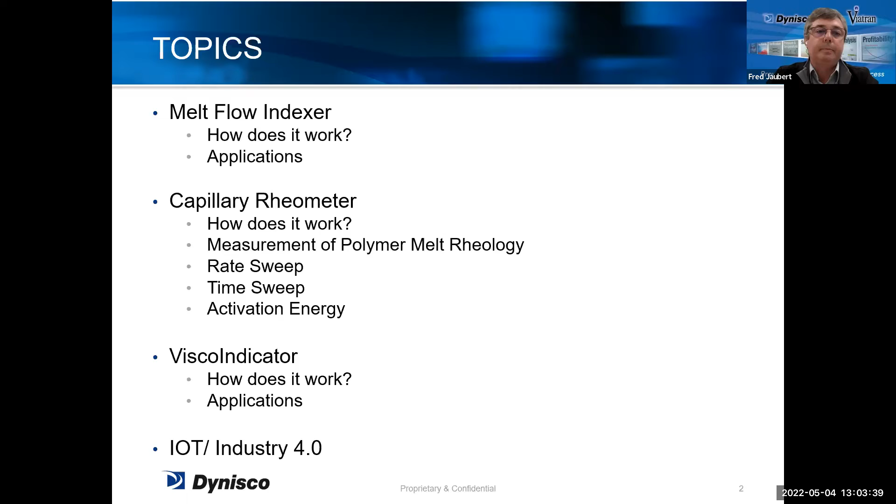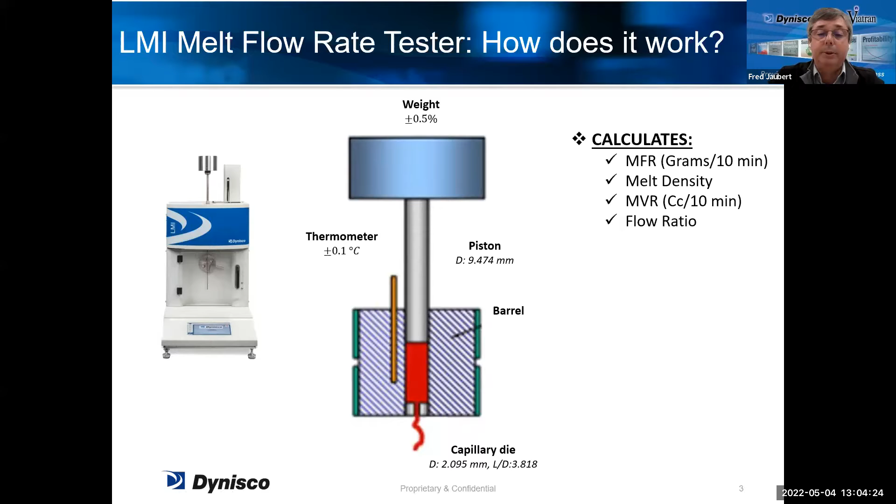So first of all, the melt flow indexer, also called the melt flow rate tester, gives a result called the MFR, or melt flow index, MFI. The principle of the instrument is pretty simple: you have a barrel which is heated at a standard temperature given by the standards, and you have a capillary die at the bottom. You put the sample of material in, heat it up, and you have a piston and a weight. You push the material through the capillary die and measure the throughput in grams per 10 minutes. That's a very basic and raw measurement, made by a lot of plastic manufacturers to check their incoming material or when they are doing recycling.

So as I said, the applications of the melt flow indexer, which we call LMI in Dynisco, is to check incoming material before processing it. This applies to all types of industries—could be extrusion, injection molding is also quite a big portion of users of melt flow indexers, because we get material in silos and you need to check the material before you put it in the silo. It's also used by recycling companies, compounders, or resin manufacturers to be able to provide the specification of the product they are going to sell to end users. Finally, it's the first instrument used in research and development for quick testing of the behavior of a plastic and the flow of a polymer.

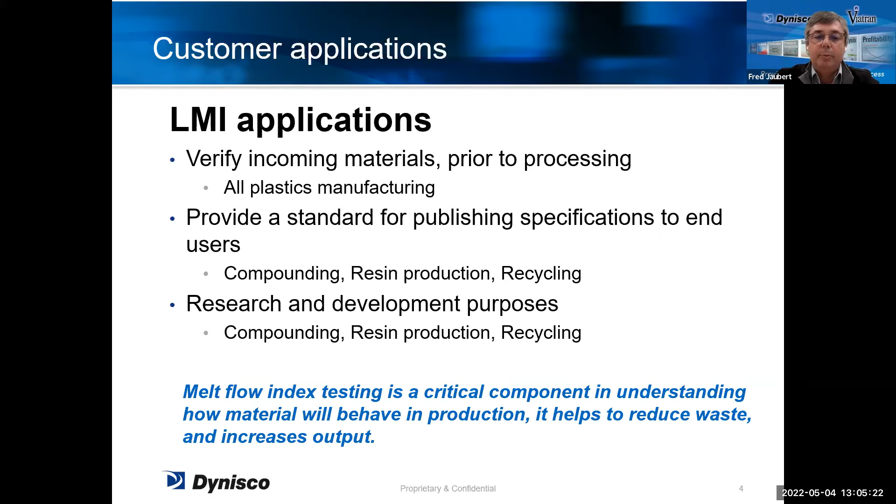So the second instrument I'm going to emphasize in my talk is what is called the capillary rheometer. The capillary rheometer is, I would say, the big brother of a melt indexer. It's a similar process: you still have a barrel which is heated at a certain temperature, but it's much more flexible. The standard used for the capillary rheometer doesn't really impose a specific temperature, load, and so on—you can really do whatever you want with it, and we will see later the results we can obtain. So basically you also have a capillary, but the capillary is also flexible.

And instead of putting a load on the top of a piston to push the material through the capillary, we have a motor, and we are applying a force, or what is called a shear rate, which is much stronger than what you can get with a melt flow indexer. In this case, we are not measuring flow by the throughput of material and weighing a sample. We are using a load cell or a pressure sensor to measure the force applied to the polymer through the capillary.

And of course, we usually have a computer system attached with software which helps make the analysis of the polymer at the end.

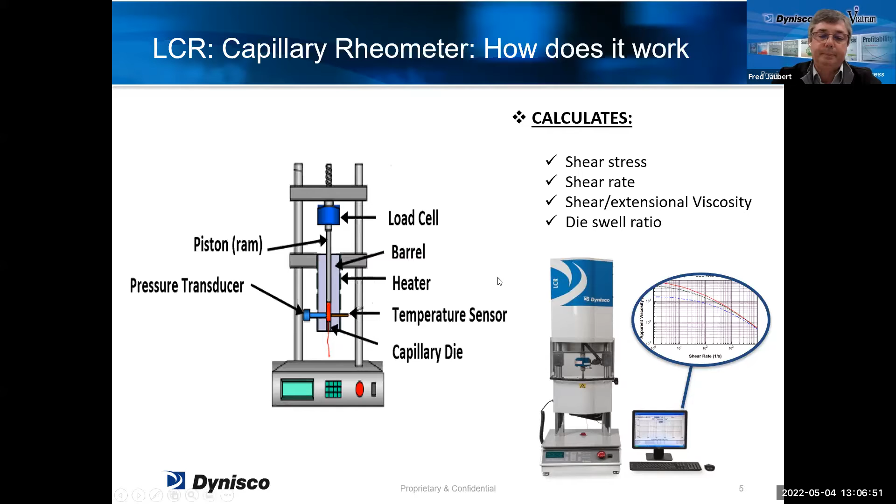So what is the advantage of using different types of instruments based on your conversion process? If you are doing compression molding, for example, which is a simple process in terms of polymer viscosity, you can use a melt flow indexer. It's well used for this type of process.

If you are doing extrusion, the melt flow index is still a valid measurement, but you are really at the border of what it can measure. And if you are doing injection molding, you have forces, so shear rates, which are much, much higher than in extrusion. In this case, the melt flow indexer is absolutely not adapted, and this is where the capillary rheometer comes into play.

You also have the dynamic rheometer. Dynisco has a sister company called Alpha Technologies who makes dynamic rheometers, where you can also make viscosity measurements, slightly different from the capillary rheometer, but with some limitations in terms of temperature and shear rate that you can apply. So basically, you have to play a little more with testing conditions.

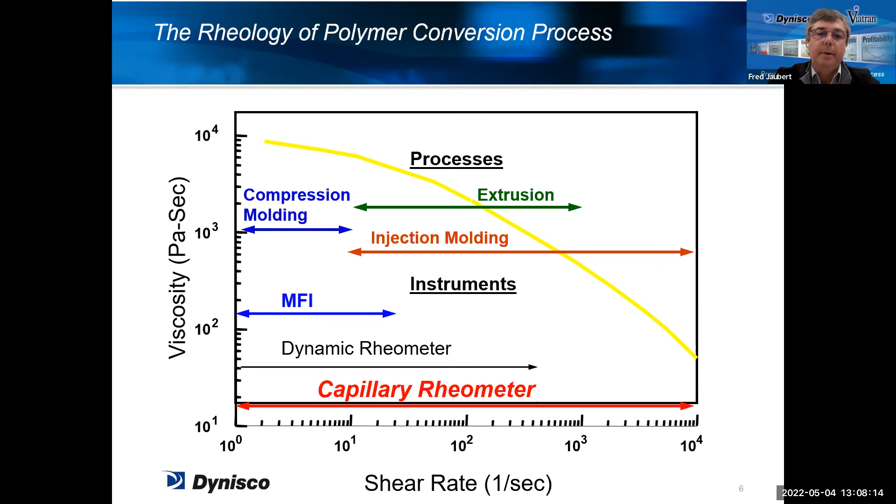So again, what are we doing with a capillary rheometer? We are measuring the melt viscosity of a polymer. Basically, as I was showing earlier, we are simulating exactly the same conversion process, especially injection molding. In injection molding, first you have a screw which mixes the polymer, but then the second step is to push the polymer through a nozzle and through channels into the mold, which is pretty similar to pushing material through the capillary die of a capillary rheometer.

So the principle of the measurement is based on the rate of flow versus the force. The rate of flow is the shear rate, and the force will be converted to the viscosity of the product.

You have two modes of operation to run the capillary rheometer. One is called the rate sweep. Basically, you are going to vary the speed of the motor, so you vary the shear rate, and then measure the range of shear stress and viscosity over that range of shear rates.

The second possibility with this instrument is, instead of running various shear rates, you can run the same shear rate over a period of time, with pauses in between, and then you will be able to measure what is called the thermal stability of a polymer.

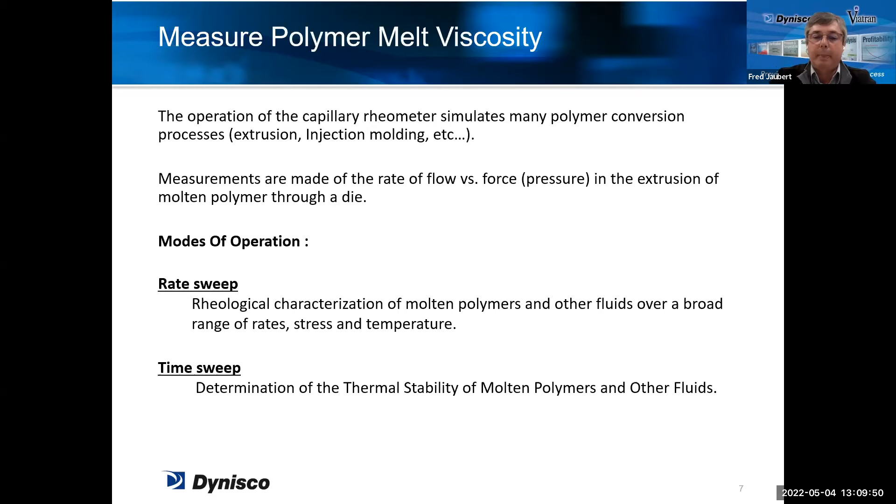First of all, what we call the rate sweep or shear sweep test is where we vary the shear rate. The polymer is melted into the rheometer, and this is done at constant temperature. In a capillary rheometer, you cannot really change the temperature during a test. You can make tests at different temperatures, but for one test, you can only run at one temperature.

What we are going to do is give a constant speed to the piston, and this will generate a constant flow through the capillary. We measure the force or pressure needed to maintain that constant flow. Once we have a stable measurement, we stop and move to the next one. So in one test, we will do several different shear rates, different speeds of the piston, to measure different viscosities of a polymer depending on the force applied to it.

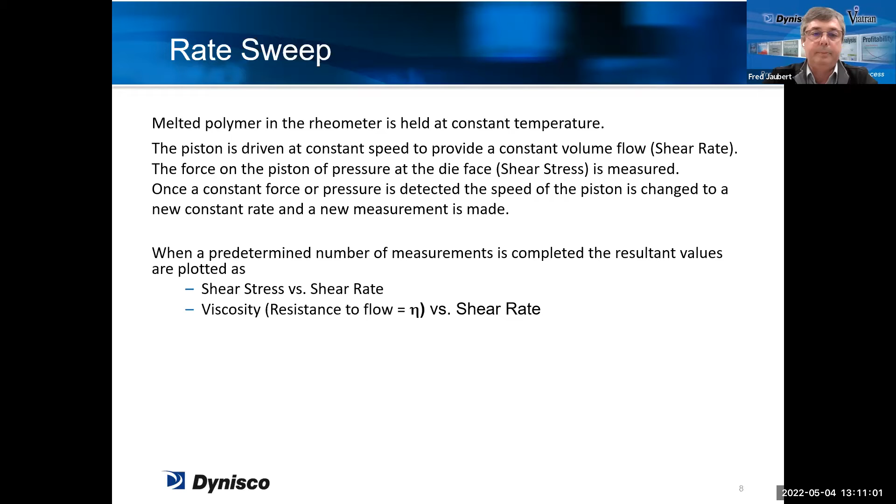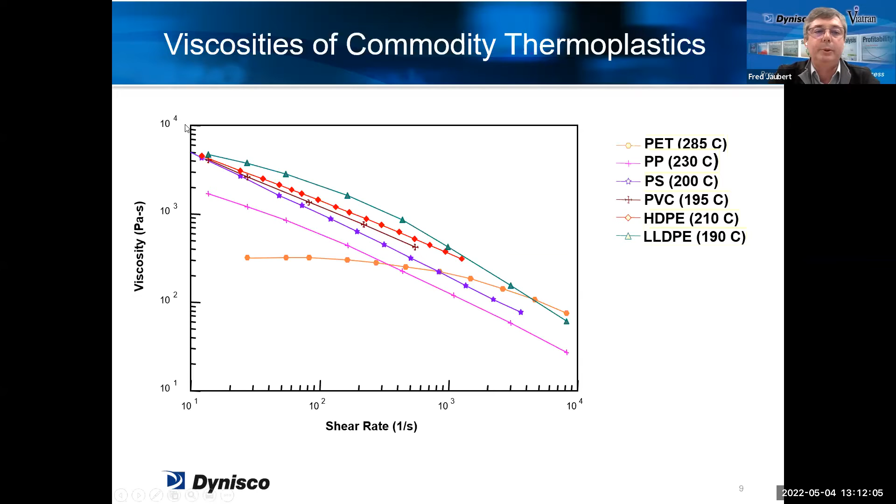I show you this just so you can see the magnitude of the viscosity we have on commodity resins and the shear rates we are generating, compared to what we get with more engineering resins. Here we are at 1,000 Pascal seconds, while when running the same testing on more engineering thermoplastics, we go a little higher. In fact, we need to extrapolate this curve, so we have much higher viscosities in this product than what we get with more commodity resins.

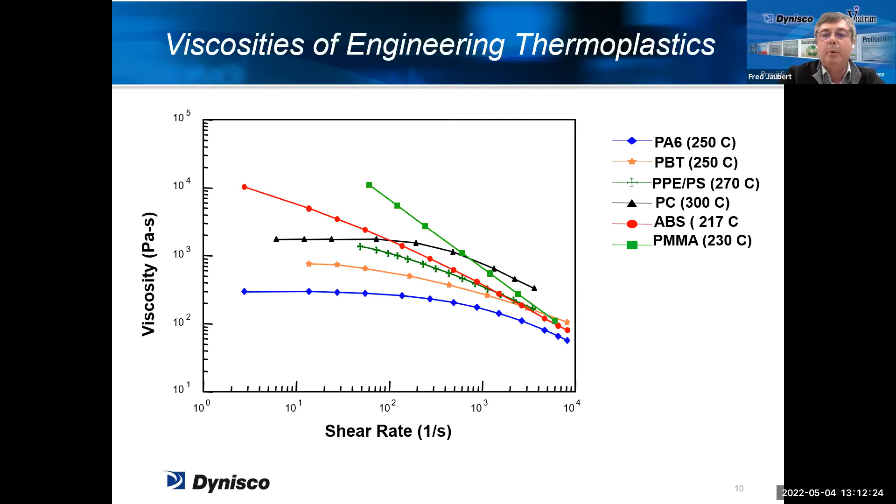You will also see that with fillers it will go up, and of course, if you increase the temperature, the viscosity will go down. Also, if you put plasticizers or lubricants, it will go down. What the capillary rheometer helps you do is define what will be the consequence of what you are changing on your polymers.

Also, we are able to see, for example, moisture, residual monomers in the product. Moisture is really critical, especially if you think of PET, for example polyethylene terephthalate, or if you think also of polyamides.

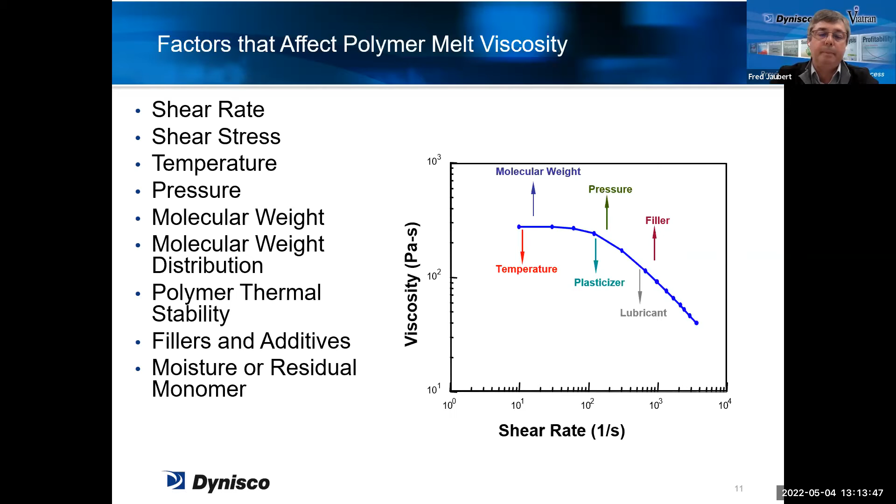The second type of test we can run is called the time sweep test, basically a stabilization test where we run at a constant temperature and a constant shear rate. So we are doing measurements at fixed intervals during a predetermined period of time - making a measurement, stopping the instrument, then starting the piston again, and taking a second measurement, and so on every minute, or every 5 minutes, 10 minutes.

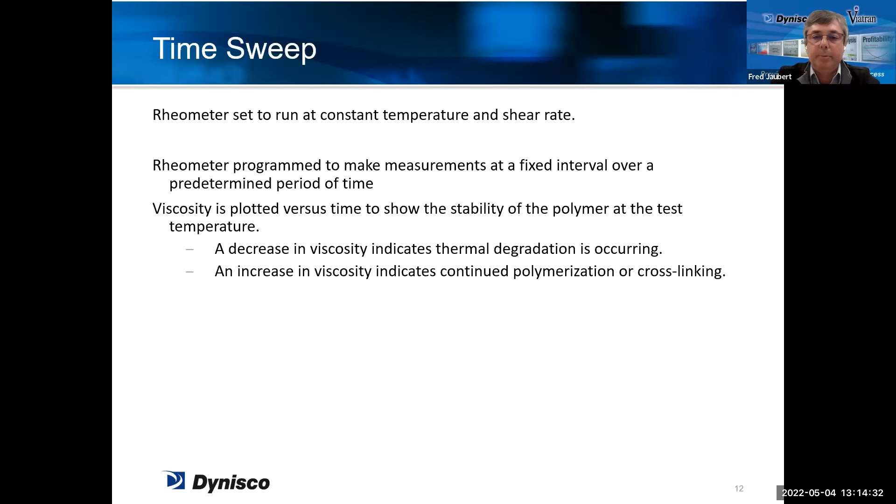Depending on what the curve does, we will see if we have thermal degradation or if we have cross-linking in the polymers. So basically, with time and temperature, you can get either degradation or cross-linking.

The result on the viscosity curve will be like this: if you have cross-linking, the viscosity is going to increase. If you have degradation, it's going to decrease, obviously. And if you have a stable product, you should not see any noticeable variation of the viscosity over time.

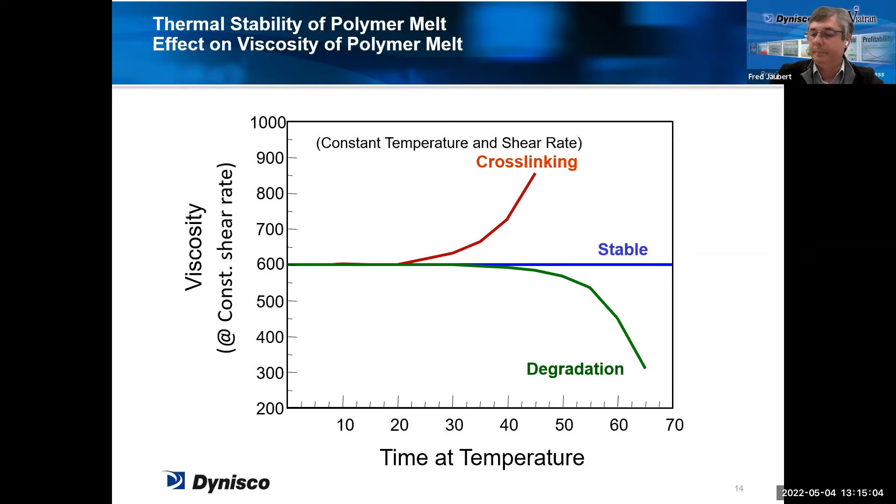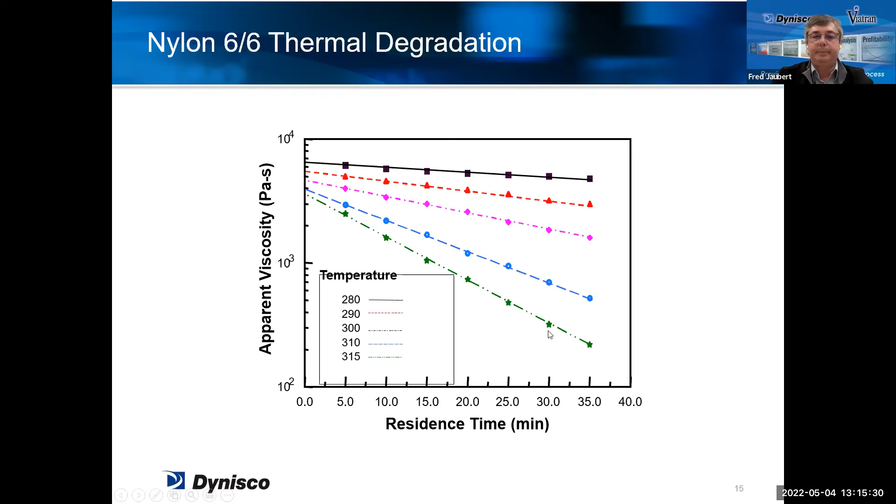This is, for example, what we can see. This test has been run on a nylon 6/6, which has been run every time for 35 minutes at various temperatures, starting from 280 and up to 315. We see obviously that the higher the temperature, the faster the degradation of the product.

So as I was mentioning, the applications of a capillary rheometer include measurement of apparent viscosity versus shear rate. It helps determine the fit of a material with a function - what you really want, what you are really expecting from your polymer. It's also used for research and development purposes.

What is not mentioned in this presentation is that a lot of software used to model flow in extrusion dies or in molds also use key parameters determined using capillary rheometers. Software like Moldflow and so on need specific values, and we can get them from our software and with our capillary rheometer.

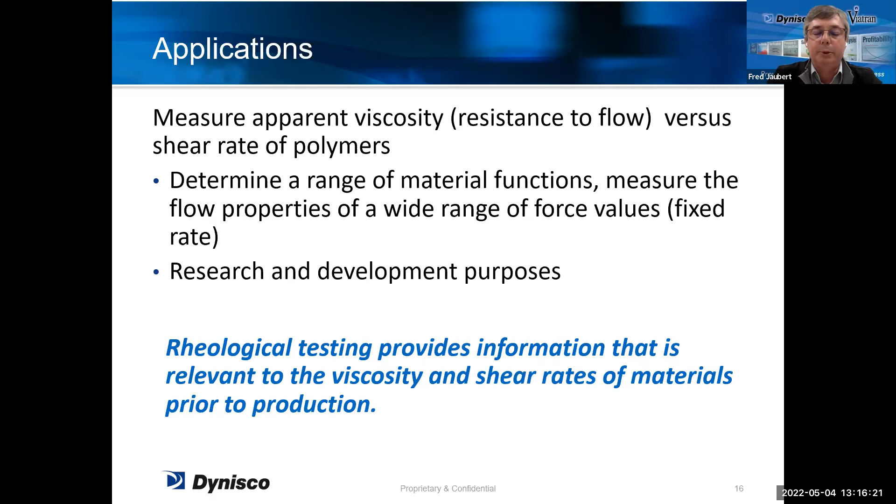The last application I wanted to discuss is something slightly different, but we can also use it, especially when you are running measurements online - it's called activation energy. Activation energy is needed if you are doing, for example, a melt index or viscosity measurement at a different temperature than the temperature at which you'd like to have a result.

Let's say, for example - this is also the topic of the next slide - if you are running a system online and want to measure polypropylene, the standard test for melt index or viscosity for polypropylene is 230 degrees C. But on the extrusion line, maybe you are running at 260 or 270 degrees C. Using the activation energy allows us to recalculate the value expected at 230, even if you are measuring it at 260 degrees C or 270.

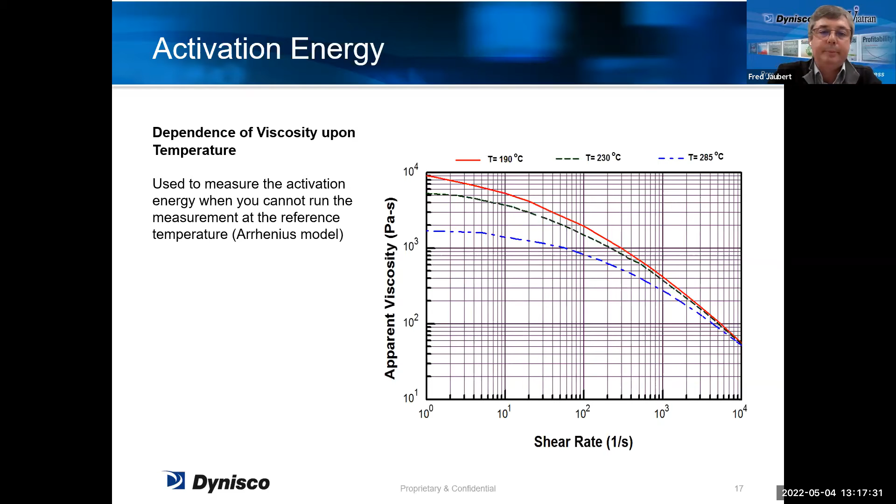One example of this is a product we developed called the ViscoIndicator, which is an online LMI LCR. The process of operation is slightly different in this case, but it's still pretty close to what we use in a capillary rheometer. Instead of having a piston pushing material through a capillary, we have a gear pump which, depending on speed, generates a flow of polymer and an increased pressure.

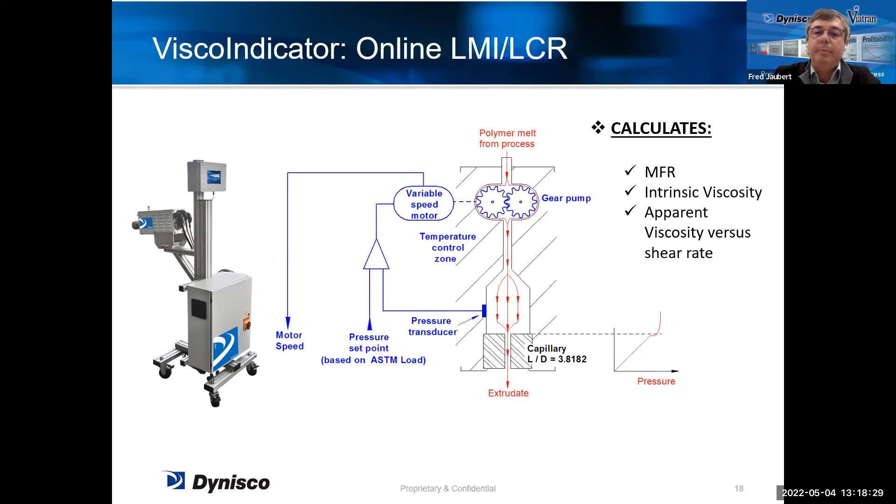For example, if we apply a constant speed and measure the pressure on the pressure sensor, we will be able to calculate the viscosity of the product. On the contrary, if we run at a constant pressure and vary the speed of the gear pump, we will be able to directly determine the melt flow index of a product online.

As I was mentioning, for this application it's continuous measurement. You don't have any operator intervention. It can be used in recycling and compounding for quality control, and it could be linked to the melt flow index test run in the lab. We are also using it for the measurement of IV online on a recycling line.

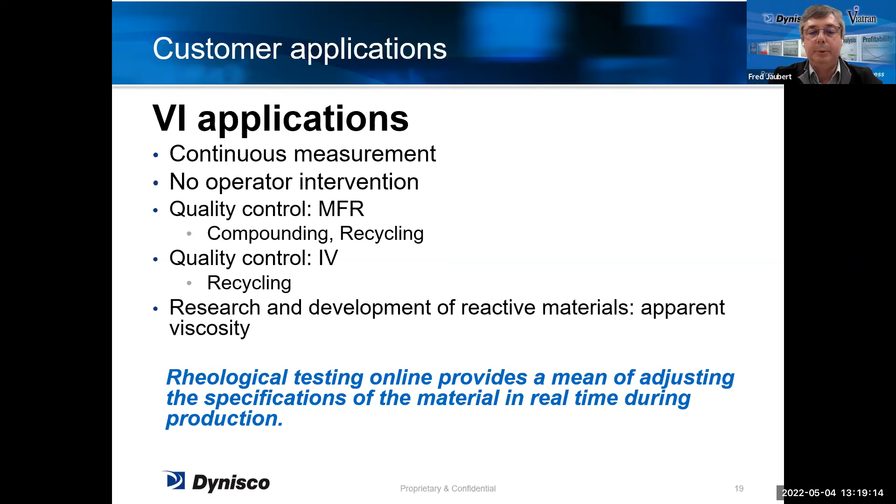Basically, this is exactly what I'm doing today. I'm at a customer to do this. So this is, I think, probably the next step for a lot of companies to go to online measurement. And last slide - I hope I haven't been too long and too boring. We have also now started to build what we call an Industry 4.0.

Basically, we can collect the results of legacy instruments - old melt flow indexers, old capillary rheometers - and also new lab instruments, and link them through a cloud to the measurements we can do online. So it means, for example, we can run our ViscoIndicator online and run a capillary rheometer test every 8 hours, and then match and check that the measurement given online is really confirmed by the measurement in the lab, for a better and more accurate production follow-up.

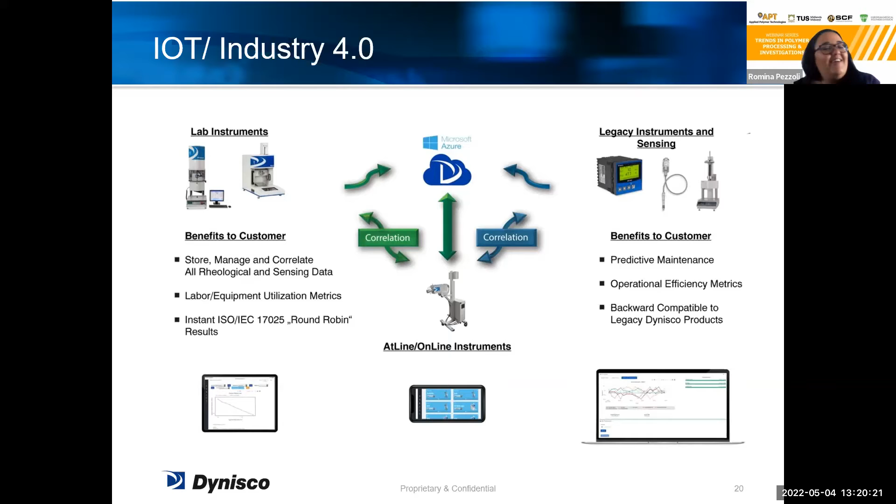So, which is better, a load cell or pressure transducer, or are both required for successful measurement? It really depends on what you want to measure. I prefer personally to use a pressure sensor to make the measurement on a capillary rheometer. But when you are really at low shear rate, you have to think that the accuracy of a pressure sensor is based on its pressure range. So you need a very low pressure range sensor to be able to accurately measure the viscosity values at low shear rate, while a load cell is much more accurate. At the same time, the load cell is also affected by the friction of the piston. So this could sometimes be an issue, but usually at low shear rates, the friction of the piston is not so much.

Great, thank you. Can the online viscosity measurer be used only in extrusion? Yes, yes, only in extrusion. We really need to have a constant flow of product. It cannot be a cycle measurement.

Is the Bagley correction required when pressing material from a bigger reservoir into a smaller die, or is it built into the software? Well, the Bagley correction is available - it's not required. The Bagley correction is really to measure the entrance effect at the die, and it is built into the software. So if you need to do a Bagley correction on our instrument, it's possible. You will need to have at least two different capillaries with the same diameter but different L/D ratios, meaning different lengths, to be able to determine the corrected viscosity with Bagley correction.